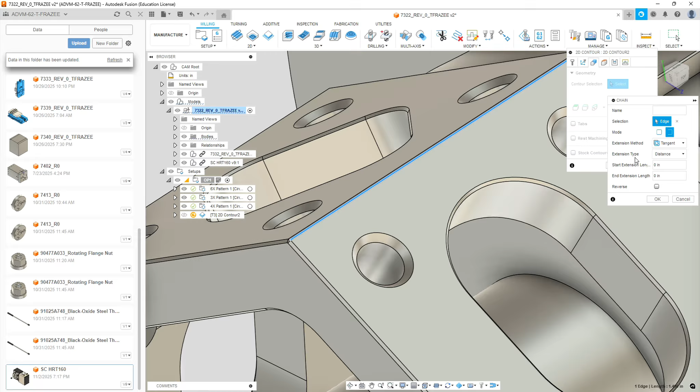So we're going to go to geometry, chain, partial. We're just going to select one edge here, and we're going to have it travel all the way across. It doesn't matter which direction it's going across the part.

Now we're going to go to the next tab, and on our heights we're going to leave this stuff at default, I think, except for the 0.75 on our rapid plane. And then our cutter will come down and just skim the top of this thing.

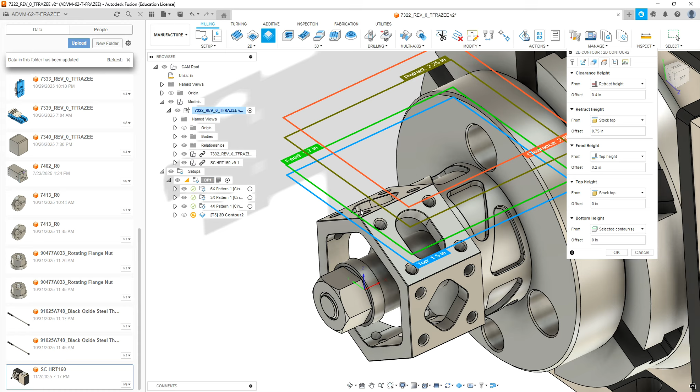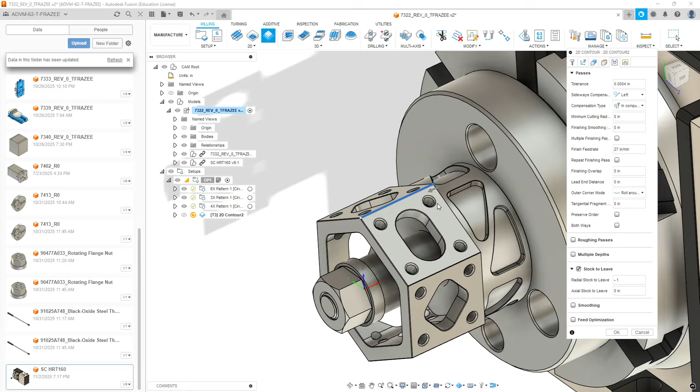On our passes tab, we're not going to do any compensation. It doesn't really matter. We're not going to do multiple finishing passes. What we are going to do is stock to leave. On axial, it's going to be 0, but on radial, we're going to go negative point - let's do negative 100 thou. And that way it's going to overcut whatever that line is we selected.

Okay, we're going to go to the next tab, and we're going to come in at an approach angle of 0. We're going to get rid of our vertical lead-in radius, but we need to extend our lead-in distance to 0.13, which is 0.13, half the diameter of the cutter.

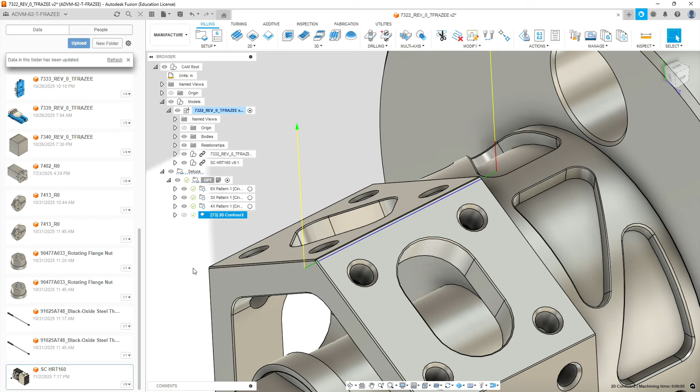And when we hit OK, that lead-in is this green section. So it's going to lead in and hopefully zip off and deburr this very first top.

Okay, now we're going to deburr this edge, which was machined with the very first face mill. We're going to go to 2D, then 2D chamfer. We're going to select our 1/4 inch chamfer mill from our library.

And leave all the speeds and feeds at default. We're going to go to multi-axis, pick tool orientation. We'll pick the face of the first face we machined and our x-axis.

We're going to go to geometry and select from our menu here our chain, partial chain. We're going to select our one edge here. We're going to hit OK, go to the heights tab, and bump this up to 0.75.

We're going to go to the passes tab. We're going to bump our chamfer offset to 0.06.

We're going to go to the linking tab, and we're going to leave all this at default except for our lead-in sweep angle, which is going to be 0. And our linear lead-in distance is going to be 0.13, which is a little bit longer than half the diameter of the cutter. And we're going to deselect perpendicular for this one. We'll hit OK. It's going to lead in off the workpiece and cut in.

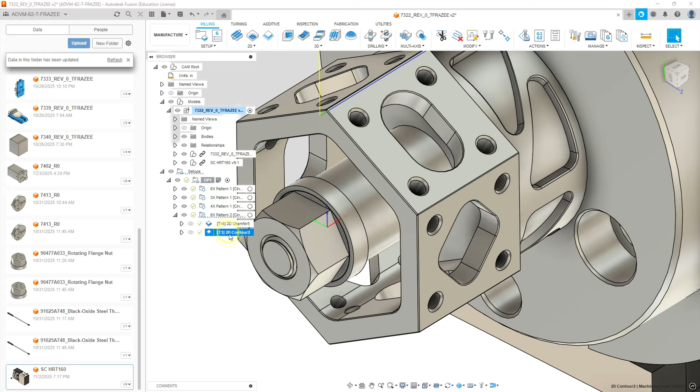And it's going to do this pattern in order by tool. So this is going to be - we're going to rename this pattern our 4X pattern 2. And we're going to drag the 2 routines we just made into that pattern folder. We want tool 3 going first. Now we can see the pattern going around 4 times.

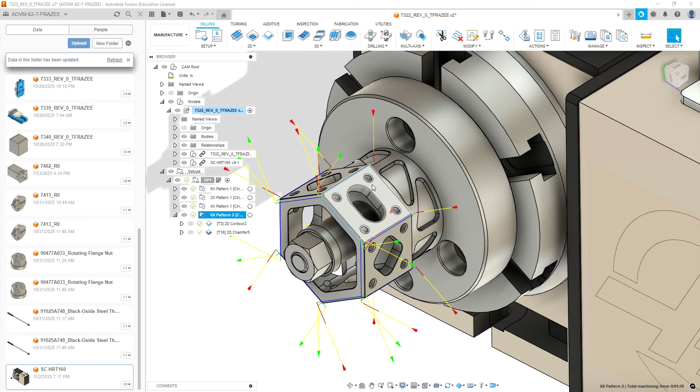So we've now deburred all those edges. I've chosen not to deburr this back edge - it's really hard to control the gouging on it, at least at the time of this recording, and it's not worth damaging this part for. So you're going to have to deburr some of these edges by hand. Okay, so next, let's deburr the inside of this oval shaped pocket.

We're going to go to 2D chamfer. You're going to use the same tool. We're going to go to tool orientation. We're going to select the box. We're going to pick the same plane we just used and the same x-axis edge.

Then we're going to go to geometry and we're going to select the top of the pocket or window, whatever you want to call that, profile. Now we're going to go to the heights tab, bump this up to 0.75.

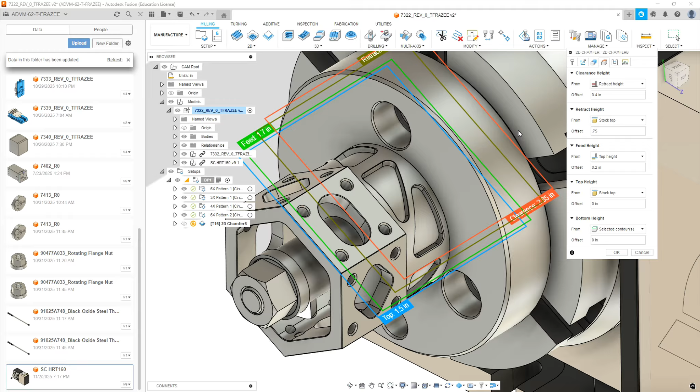Now we go to the passes tab and we're going to set this also at 0.06. We're going to check the smoothing box. On the linking tab, we're going to leave all this at default and hit OK. Okay, so we now have our deburring on the inside of this feature.

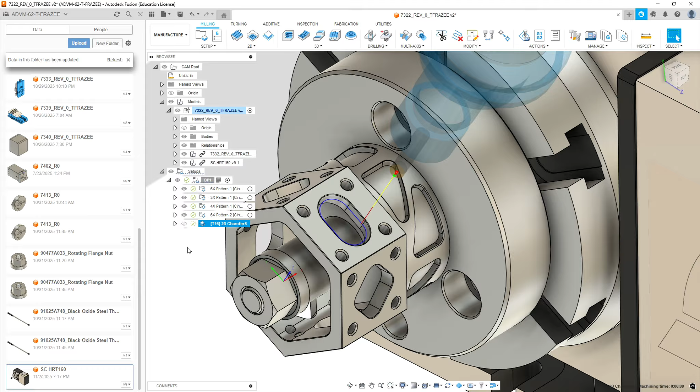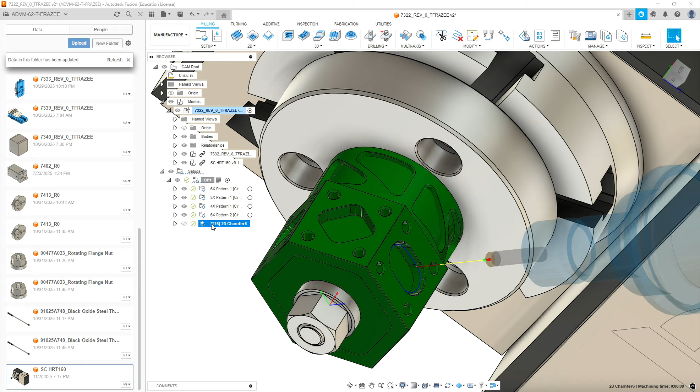Now let's do the deburring on the inside of the diamond shape feature. We're going to do 2D chamfer. Actually, what we can do is let's just copy this routine we just did. So we're going to go duplicate. We're going to go edit.

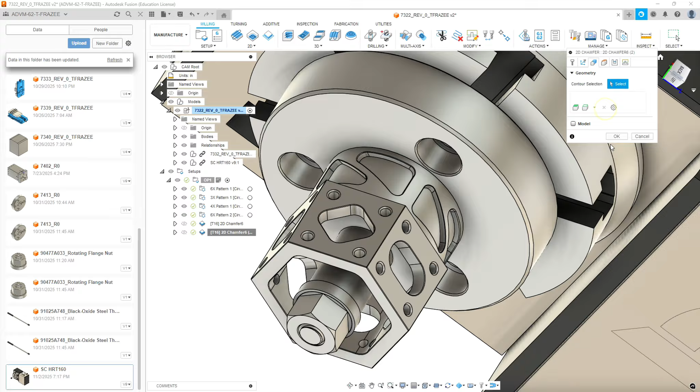On the multi-axis tab, we got to clear the face we selected and pick the face with the diamond on it. Then we're going to go to geometry and we're going to clear the geometry that was selected in the previous copy. And now we're going to pick the geometry associated with the diamond.

And then on the heights tab, we should be able to leave this at default. Passes, we should be able to leave this at default. And linking tab, everything at default. And now we have the chamfer that occurs on the diamond.

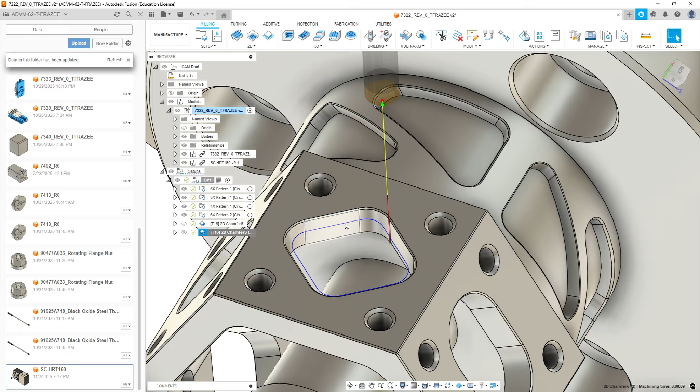Now we can create our pattern. We're going to go setup, new pattern, circular. Our axis is the cylinder. It happens in 3 instances around 360 degrees, and we hit OK.

Now we're going to call this our 3x pattern 2.

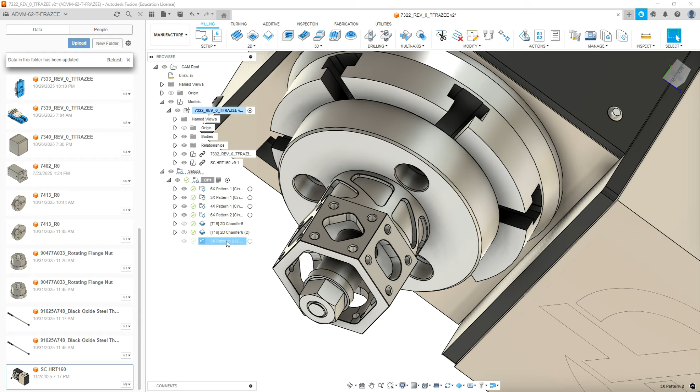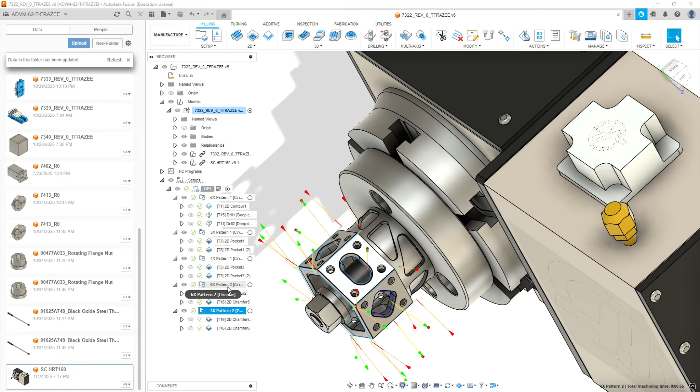All right, so now we're going to drag our 2 chamfer commands into that folder. Kind of doesn't matter which order they go in, and you can see now they're duplicated all the way around. You should be able to see that you've got the different pattern folders, and for each of the items labeled how I have it.

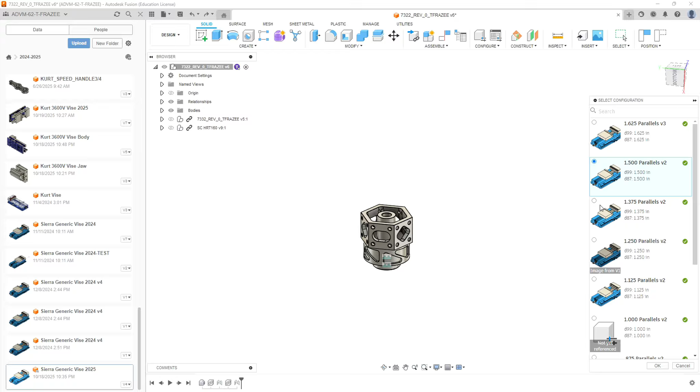Okay, we're going to go from manufacture mode and we're going to go back to our design panel and open up the design panel, and we're going to bring in a version of the vise. We're going to select the 1.5 inch tall parallels, and the reason is the base of this part to this bottom ledge is 1.5 inches. We're actually not going to put the parallels in as shown in the model, but it'll help us assemble this. We're going to hit OK.

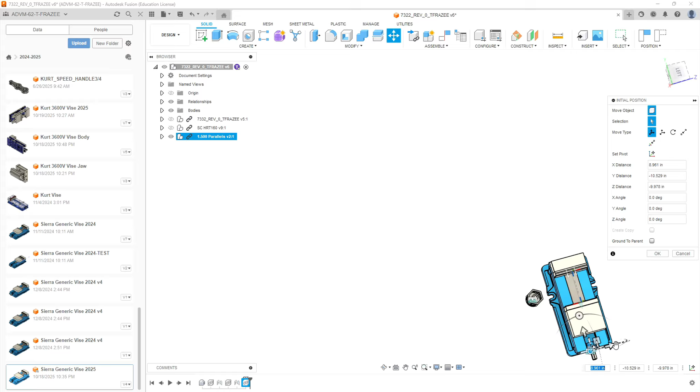And we're going to rotate our vise 90 degrees. We're going to move it down below our part. And if we look at from the top view, we need to get the jaws parallel to 2 faces of our part. So we're going to rotate this 30 degrees, and that should get these 2 jaws parallel to the 2 faces of the hex. We're going to hit OK.

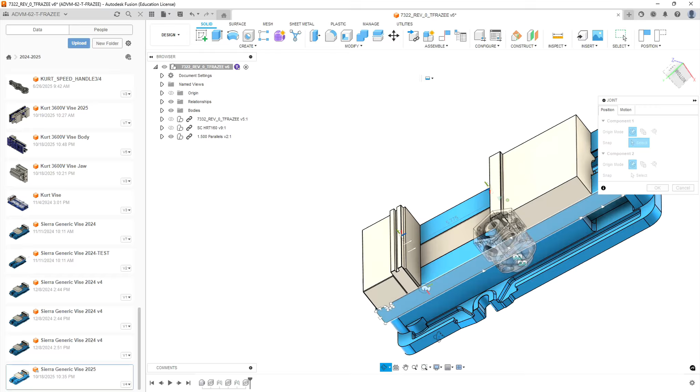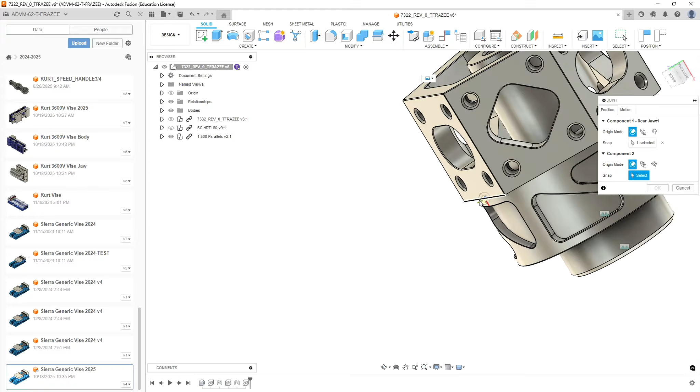Now we're going to go to Assemble, and we're going to do a joint. And we're going to do that joint in between the top center of the 1.5 inch parallel and the bottom center of our part, which should snug it in like this. Now, in reality, we're going to have the bottom of this part on the bottom of the vise jaw, and then we won't put parallels in. Okay, we'll hit OK.

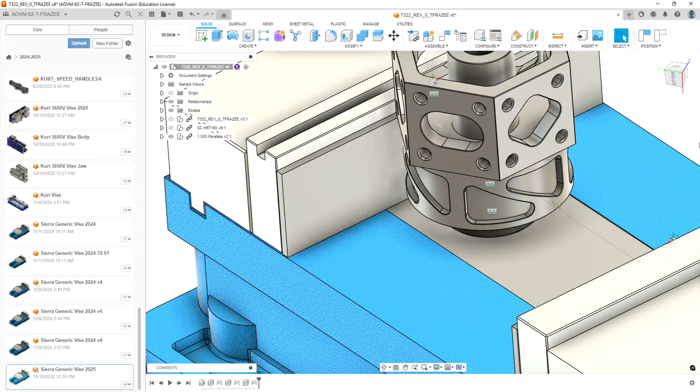In reality, we may need to put a parallel flat on the bottom, and it'll be sitting 1 parallel thickness high. That's okay because our origin is going to be set by probing the top of this and the center of this bore.

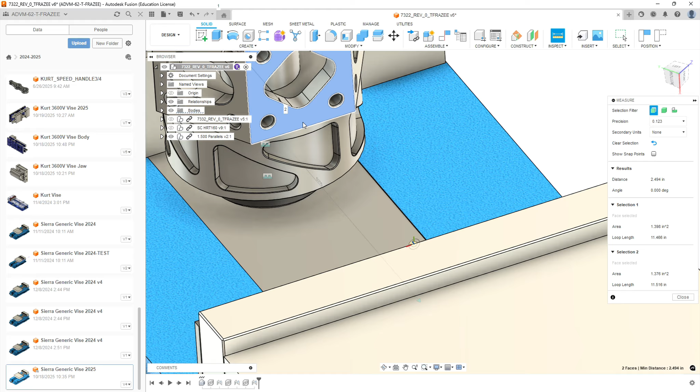Okay, so our width of our component is 2 inches 494 thousandths. So that's what we need to put in for our vise width. 2.494.

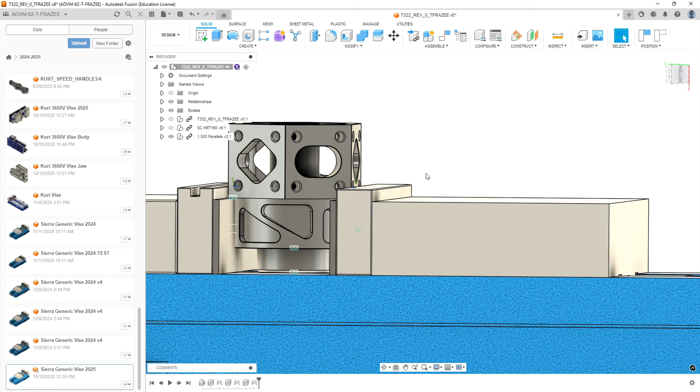Okay, and there's our vise clamping our piece in. Let's hit save. Now we're going to go back to manufacture mode.

And we're going to create a new setup. On this setup, we're going to use as our stock, from solid, and we're going to select the actual model of our part.

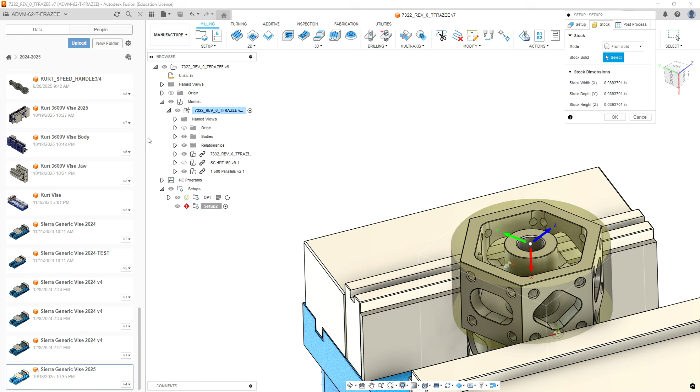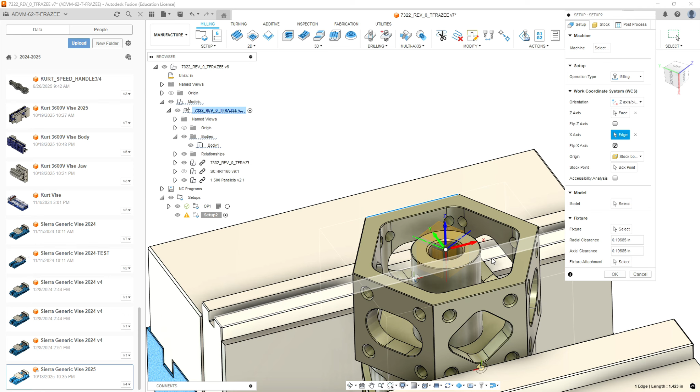Our actual finished part is going to be the body. Our setup will use Z-axis and X-axis. We're going to select the top face of the part, and our X-axis is going to be in line with the edge of the hex that's lined up with our vise. We need to flip our X-axis so it's in the same orientation as it would be on our machine.

Okay, we're going to go to post process. We're going to call this 7322. Program is going to be op2. If you want, you put in parentheses, 3-axis.

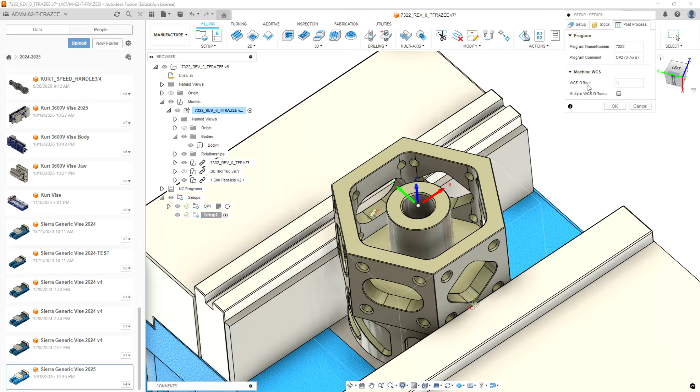And then we're going to use work coordinate system 1 because we're back in a vise with G54. Hit OK. We're going to change the title of this to op2.

We're going to put some notes in. I'm going to right click on this, go to edit notes. Note 1 is going to be: work coordinate system G54, X, Y, Z origin is top center of part, machined part.

Number 2, part to rest on parallel flat on throat of vise. 3, vise clamping pressure 10 foot-pounds.

Okay, so now we're going to pocket the inside of this. We're going to use a 1/4 inch end mill. So go to 2D pocket. We're going to select our 1/4 inch end mill from our library.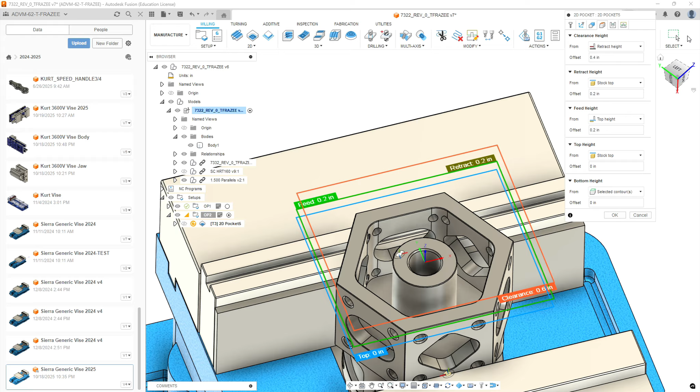Okay, we're going to keep the default settings on its feeds and speeds. We're going to select the surface of the bottom of our pocket. We're going to go to the Heights tab and leave all this at default. We're going to go to the Passes tab, and we're going to select Morph Spiral.

We're going to do multiple depths. Our maximum roughing step down is going to be 0.125, half a diameter. We're going to do one finishing pass. That step down at the finishing at the bottom is going to be 0.01, 10 thousandths. We're going to do even step down.

Okay, we're going to go to finishing passes. We're going to do one. We're going to use wear compensation. Our finishing smoothing deviation is going to be 4/10. We do one finishing pass, and we're going to leave 10 thousandths for that cutter to remove.

We're going to go back up to our maximum step over, 0.125, half the diameter of the cutter. Actually, let's do 100 thou. This is going to go pretty deep. Finishing feed rate's fine. We're not going to leave any stock.

We are going to pick our smoothing on, and we're going to hit feed optimization so it slows it down on corners. We are going to finish at every depth because our cutter's not long enough to finish only at final depth, and we'll get a lot of cutter flex anyway.

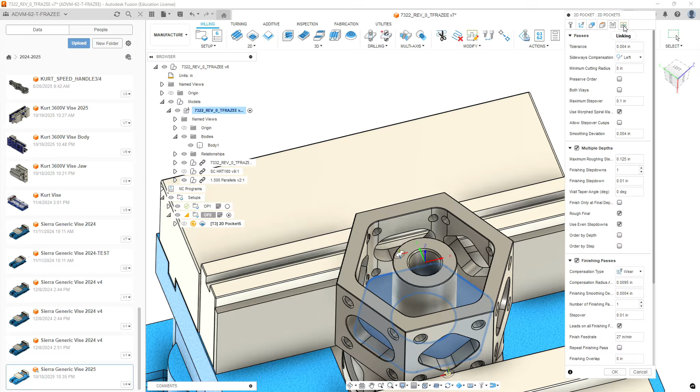Okay, we're going to go to the Linking tab. We're going to leave all this at default except for our vertical lead-in radius is going to be 0. Our ramp type, we're going to switch to zigzag, and our maximum ramp step is going to be 125, and our ramp clearance is going to be 50 thousandths. We're going to leave everything else at default.

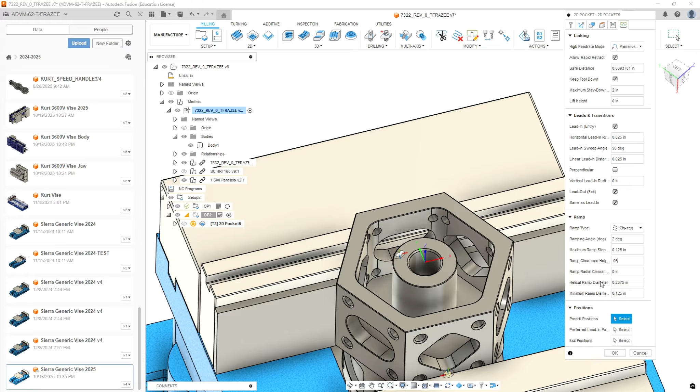Okay, so there's our roughing and finishing cuts on the interior. Now the only thing left is we have a chamfer here and a chamfer here.

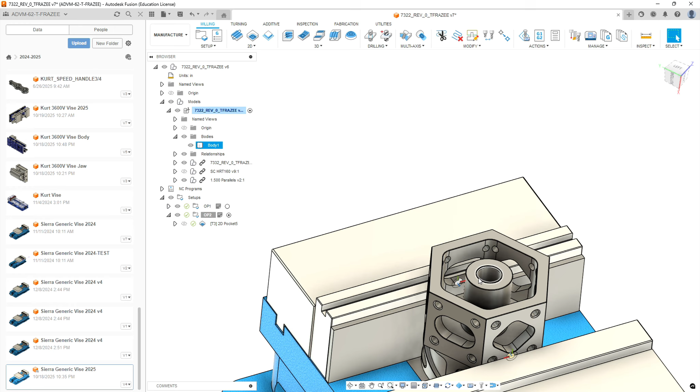So we're going to go to 2D chamfer. We're going to select from our library our 1/4 inch chamfer tool. We're going to leave everything at default there. Under geometry, we're going to select the inside hex, the outside of our boss, and the top of our 1/2 inch hole that goes all the way through.

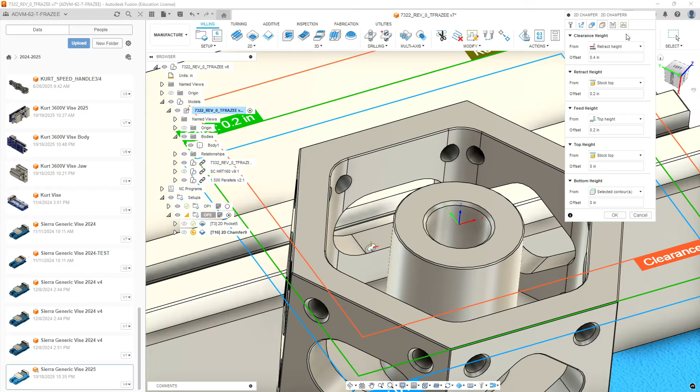We're going to go to heights and leave all this at default. At passes, we're going to leave all this default except for our chamfer tip offset is going to be 0.06. We're going to check the smoothing deviation box. We're going to go to the Linking tab, leave all this at default, and hit OK.

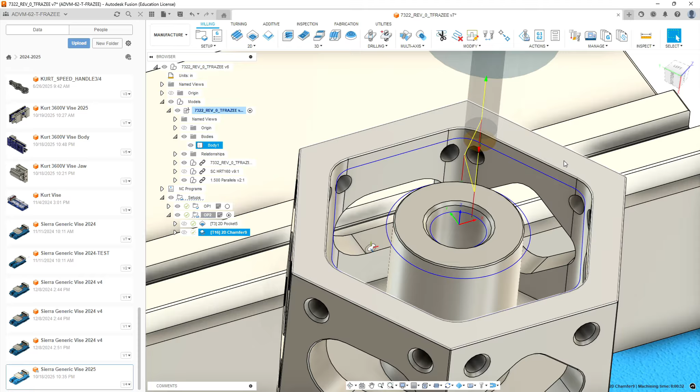Alright, we should have our chamfers going around, and we've successfully now programmed the 7322 part.